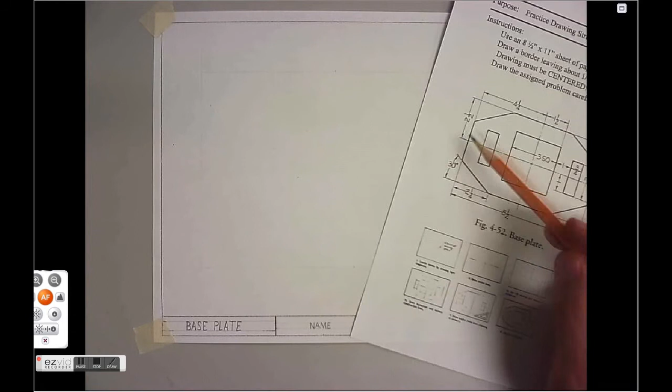To start with this one, I started down this corner because that's where I have the most information from. And, like I said, you should have a rectangle. You can probably faintly see mine up on here. But it's 2 1/4 in from this edge to this point at the start of this 30-degree angle. So that's one of the easiest places to start.

I'm going to do 2 1/4. Mark it really lightly. Then it's a 30-degree angle till you hit that line. Then if you want to save yourself some time, this measurement is the same up here, like that. And you go back at a 30-degree angle over here. And same thing, measure once over here, 2 1/4. Up. Transfer that measurement over like this.

Then use your 30-degree angle on top of your parallel bar. Get 30 degrees here. Then 30 degrees here.

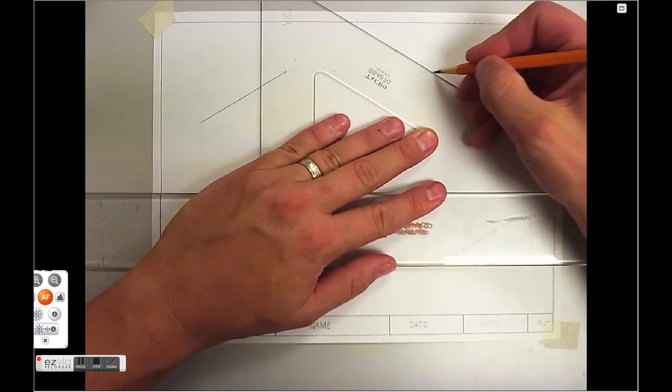Next, what you should do is start on the big square in the middle. And to do that, you have to find the center. It gives you the measurements. It's 2 1/2 and 4 1/4. So go 2 1/2 down from the top. And up right in the center. And these are going to be really light because you're going to end up getting rid of them.

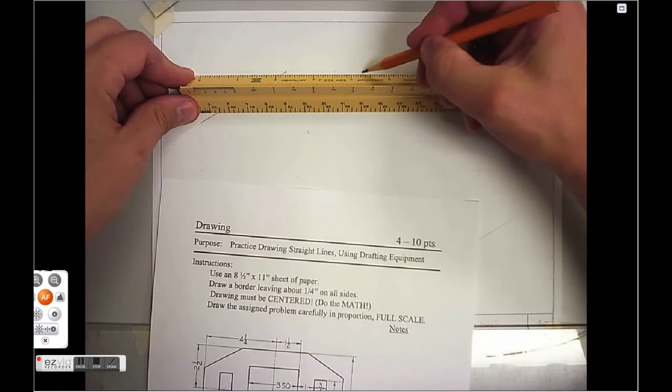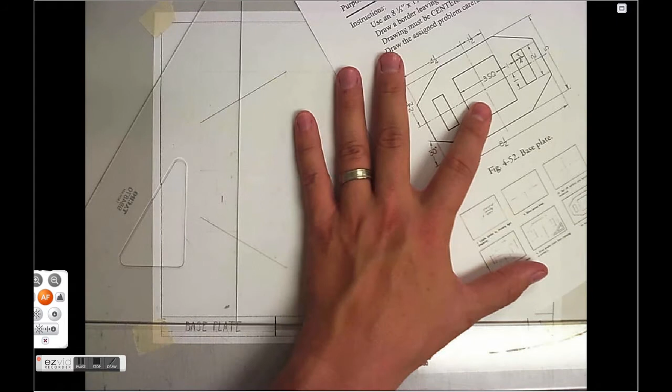Then 4 1/4. There. So there's the middle of this object. Now it's 3 inches square, so that means it's 3 inches on all 4 of these sides. So since we have the middle on here, that means we have 1.5 inches from here to here, from here to here, 1.5 inches from here to here, and 1.5 inches from there to there.

So I'm just lining up 1.5 inches, and I make a mark at 0 and a mark at 3. And I do the same thing over here. Line up 1.5 inches right smack dab in the center. Mark at 0, mark at 3. Then I go ahead and draw these lines.

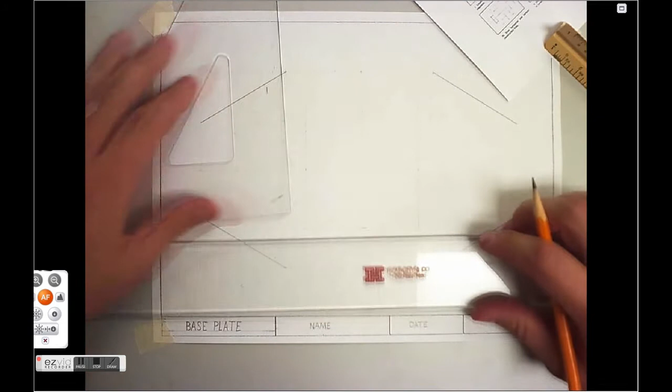Okay. I'm going to darken these in. So this is what you should do. This is what visible lines should look like, or object lines, we also call them.

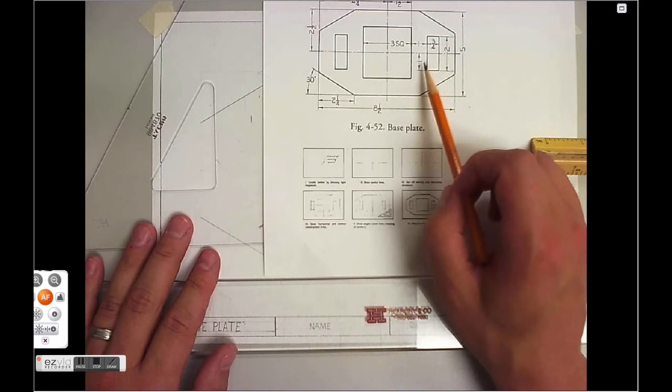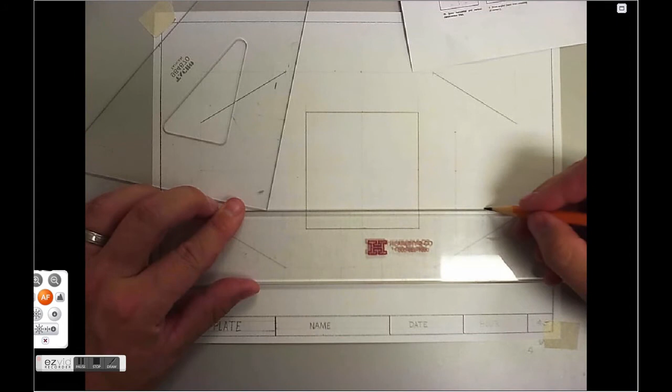Okay. Finally, these little rectangles in here, we know they're 1 inch over. They're 2 inches wide because it gives us 1 inch here, which means the top has to be 1 inch. And they're 3/4 thick. So 1 inch over. And we're going to go 1 inch up, down. 3/4. That up. And you do the other one the exact same way on this side over here.

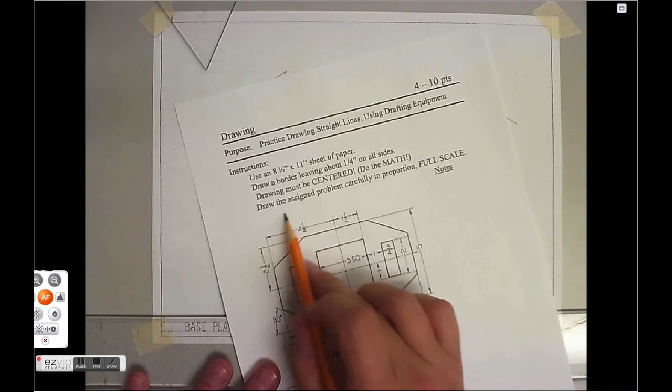The only thing I'll have to do is go and darken all these lines that I made. And other than that, you can see this one does not need to be dimensioned on here. So you will not have any of these dimensions. And that's how you're going to do drawing 4.